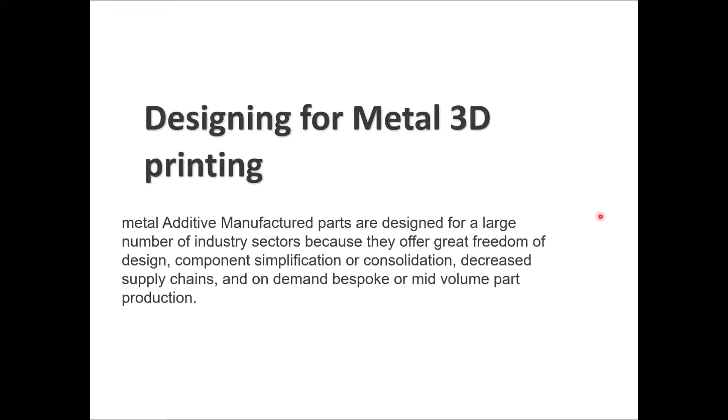Flashback to metal printing. Again, you have your laser being directed in a programmed way on the surface of the powder, and it will melt the powder and form the layers. Then the base will lower down the thickness of a layer and build the next layer, and so on until you get your final part.

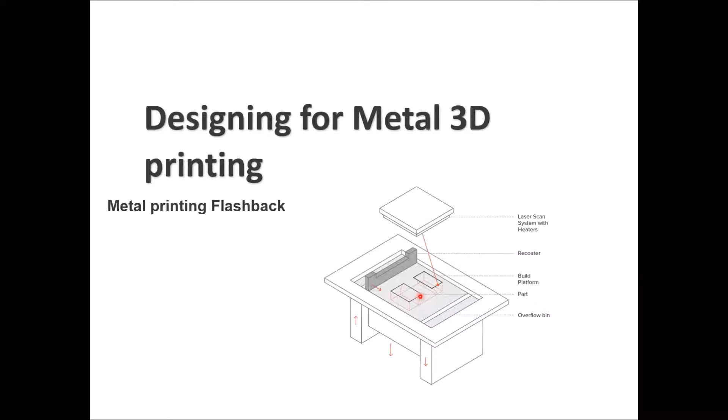The properties we want to look into while designing for metal 3D printing include wall thickness. The minimum wall thickness needed to ensure a successful 3D print with this technology should be 0.4 millimeters or higher. You can go thinner or finer, but this depends on the material, orientation, and printer parameters you're using.

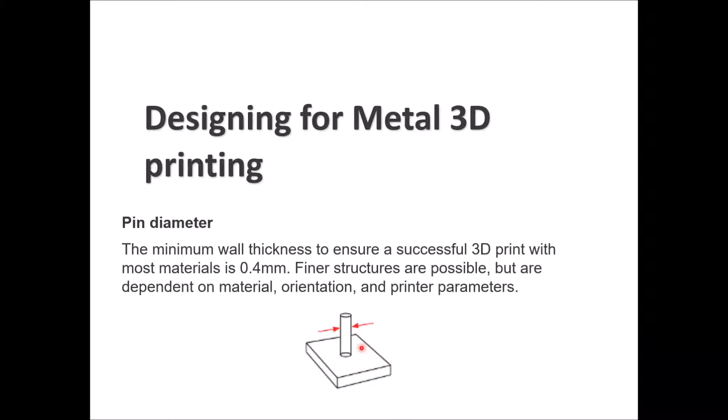For the pin diameter, the minimum diameter for that pin should be 0.4 millimeters.

For the hole sizes, hole diameters should be between 0.5 up to 6 millimeters without any support. If you want to build holes without any support using this technology, you can go up to 6 millimeters or even 10 millimeters, but while taking care of the orientation.

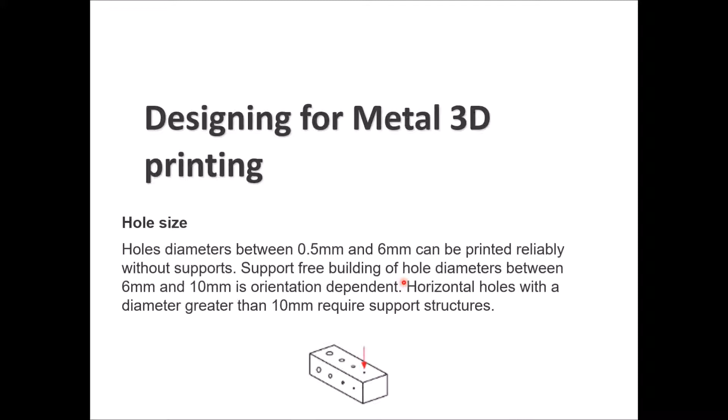If you have horizontal holes with a diameter greater than 10 millimeters, then you need support in that case.

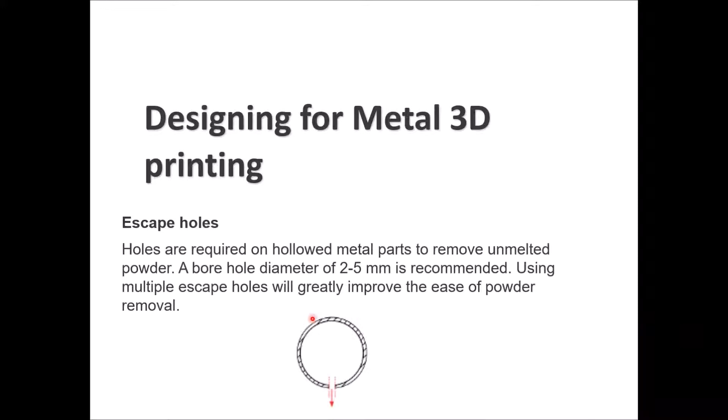Escape holes: any technology doing 3D printing based on powder needs some escape holes to clean up any unformed powder out of your design. Holes are required on hollowed metal parts to remove the powder. The bore hole diameter should be 2 to 5 millimeters as a recommendation. If you create more than one escape hole in your design, that will make your life easier while cleaning the powder out, giving you more options to get rid of the powder inside.

Overhanging surfaces: if you have a design with an overhang that doesn't have support, then you have some limitations. Without doing any support design for the overhangs, the surface should be 45 degrees relative to the horizontal. But it's possible to reduce this angle further by optimizing the laser parameters for the printer.

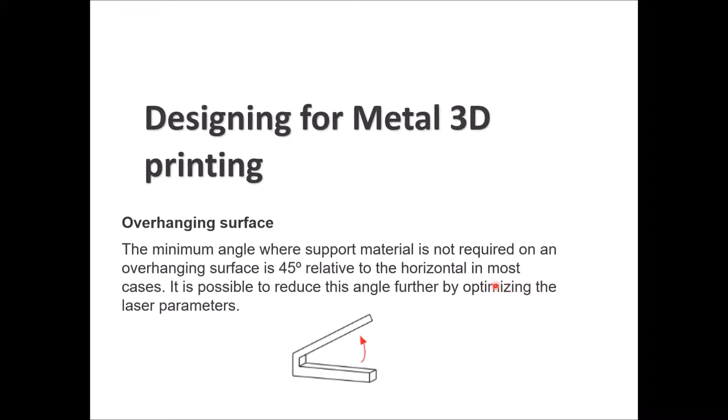If you have unsupported edges, as we can see here, these lips are unsupported edges, a kind of bridging as you remember from before. So if you have that kind of design, the maximum length of the cantilever style overhanging surface should be 0.5 millimeters. If you have overhanging horizontal surface support, it can be 1 millimeter long.

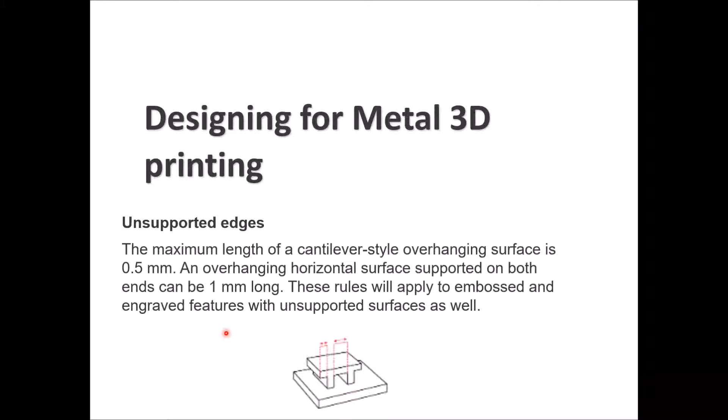You can apply these same rules if you have embossed or engraved features with unsupported surfaces as well.

For the aspect ratio, the maximum ratio between the vertical pin height and the part section is 8:1. So the height relative to the part section should be 8:1 - if this height is 8 millimeters, then the thickness should be 1 millimeter, so that there's stability for the printed parts on the build plate. Otherwise it may bend, curve, or fail entirely.

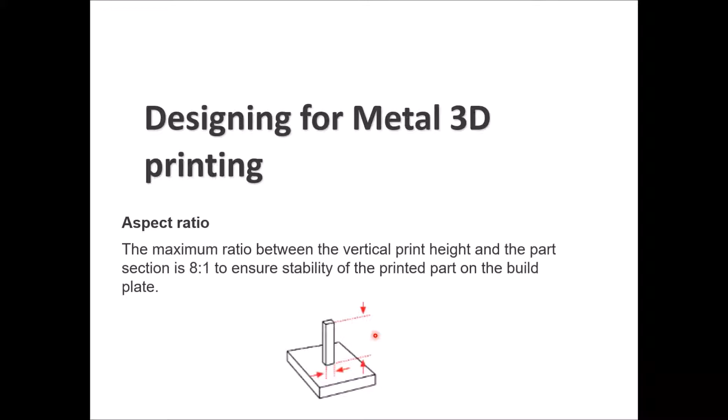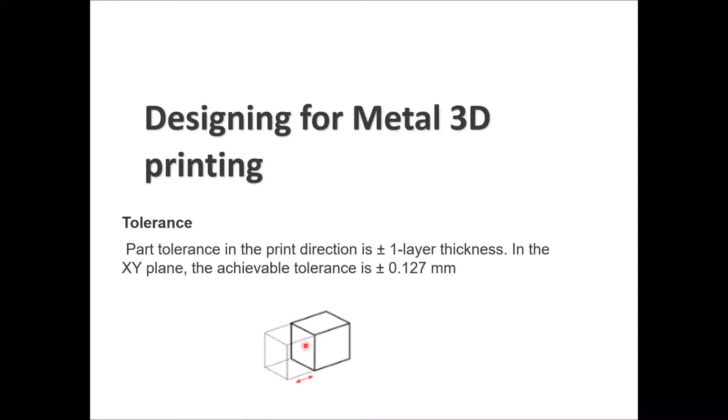For tolerances, the part tolerances in the print direction could be plus or minus 1 layer thickness. In the XY plane, the achievable tolerance could be plus or minus 0.127 millimeters.

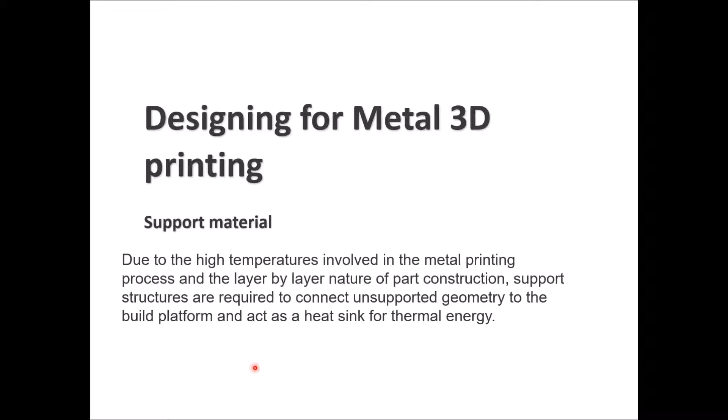For the support material, in this kind of 3D printing you are melting the powder to create a metal. There are high printing temperatures involved, and a layer by layer nature of part construction. So support structures are required to connect unsupported geometry to the build platform and act as a heatsink for the thermal energy.

So the support performs main roles for the part made using this technology. Metal printing melts or sinters the layer of powder at very high temperature, so each layer needs something solid to be built upon. It's not just powder that you solidify with a laser like the SLS process - for any section not attached to the build plate, you need support structure printed first, then you have your solid section built on the top surfaces. Just keep that in mind.

Residual stress is a concern as well for this technology, because it results from differential cooling, which makes each layer of a metal print want to curl up or distort. You need to add support so that it helps draw the heat out of that layer, so it will be sealed down in place and will not curve, curl, or distort during printing.

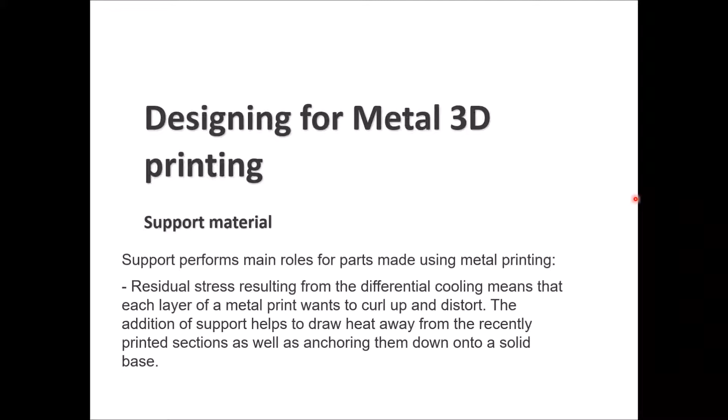As we can see here, this is a metal 3D printed part. You can see the supported materials inside the part. These supported materials need to be removed when you finish your print. The surfaces in contact with support always need extra post-processing so you can have a good surface finish.

This body here will be smoother than this one by nature, but you need post-processing for the unsupported parts, but mainly for the supported parts, with a focused and repetitive process to achieve the smoothness or surface finish you need based on your application.

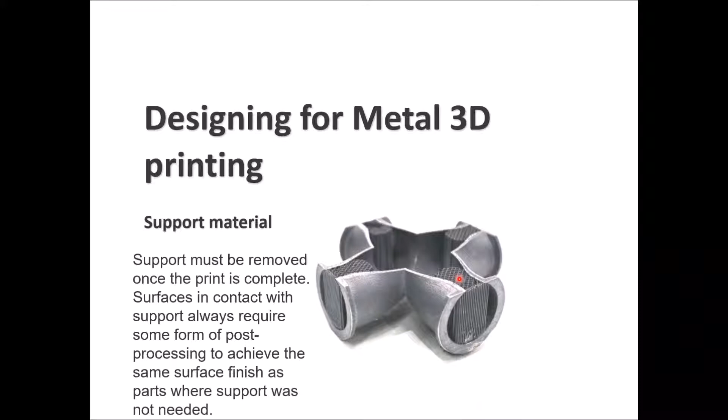For the surface quality, sometimes your design requires one side of the part to have a smooth surface, which is the side that people can see. In that case, where you care about the smooth surface finish, you always need post-processing.

If you want the part to have good surface quality, you also need to take care of the orientation. Always design your part with upward facing surfaces in mind, because the upward facing surfaces will have sharper edges and a better surface quality than the ones facing the base of the print.

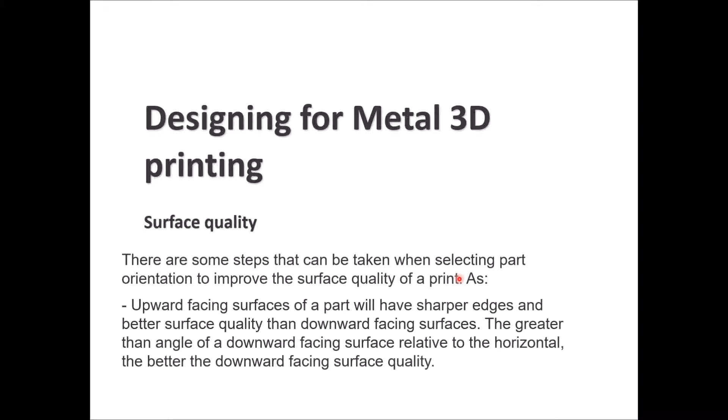The greater the angle of a downward facing surface relative to the horizontal, the better the downward facing surface quality.

A limitation of this kind of printing technology is the cost. The cost of the metal additive manufacturing machines and the material used are very high. So most likely you will go with traditional methods of manufacturing because they are more cost-effective solutions.

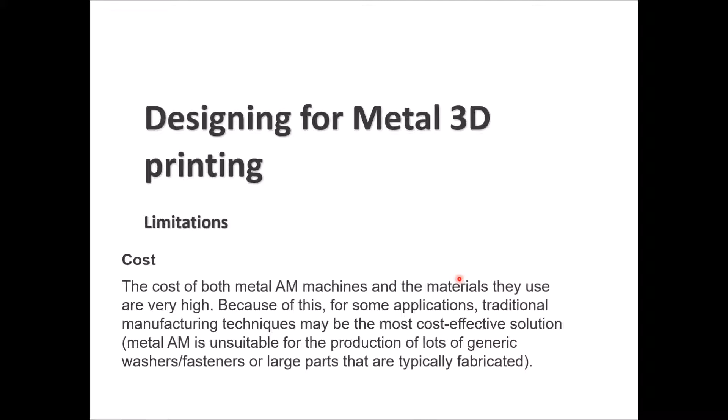But if you are doing a professional purpose solution, then you can go with this method: design for additive manufacturing.

Usually people think that metal additive manufacturing can fit all applications and designs, the same as conventional 3D printing technologies, like anything printed with FDM or SLS can be printed with metal 3D printing, but that's not always true.

If the part was originally designed for conventional manufacturing, then most likely there's a high possibility that you will fail to print that part with metal 3D printing.

As we mentioned previously in other lectures, before you start your design, you want to think about what kind of 3D printing technology you're going to use, what kind of material, what kind of printer, and what's the limitation and capabilities of that printer, before taking any step toward the design, because your design will change a bit differently between each 3D printing technology.

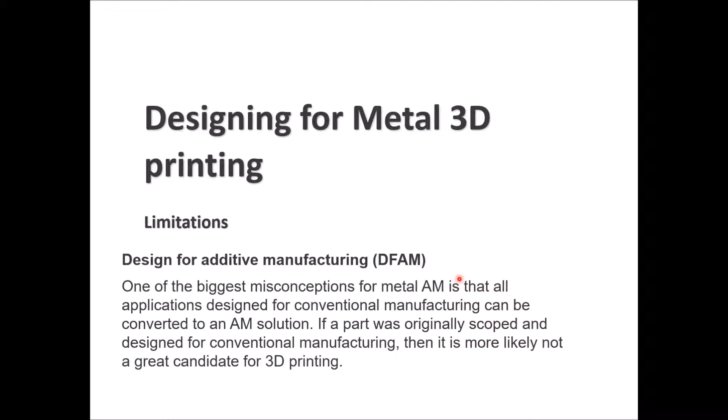Metal 3D printing is considered a complex printer. Usually they are not plug and play. Even the material itself and its application, the way you add it to the printer, all of that needs technical expertise and technical skills.

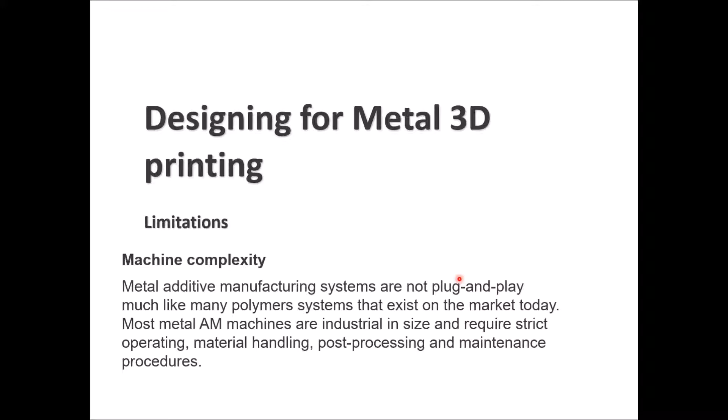Most metal additive manufacturing machines are industrial in size, as big as a closet. You need controlled operation and material handling, post-processing, and maintenance during operation.

Most common post-processing methods for metal printing are heat treatment, support removal, machining, and surface treatment.

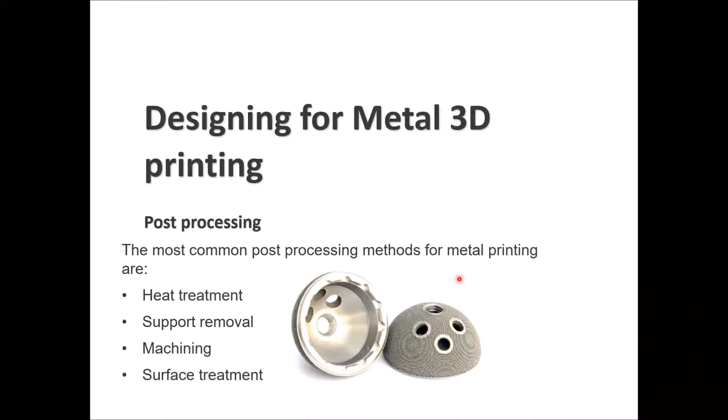General rules for metal 3D printing: support is critical for the metal printing process, and the geometry, placement, and amount used should be optimized to save time and cost.

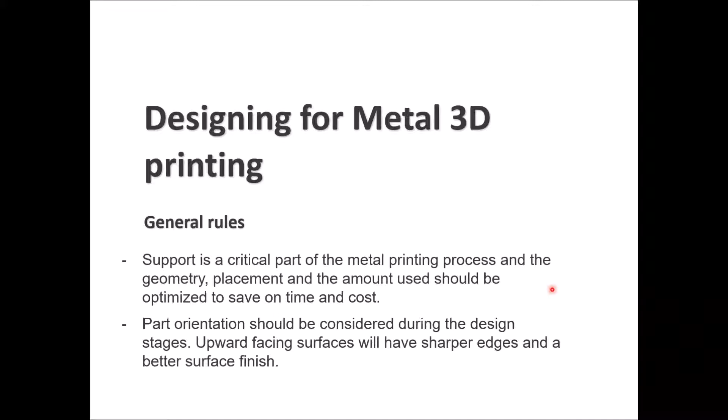Part orientation should be kept in mind during design stages. Upward facing surfaces always have sharper edges and a better surface finish than the downward facing surfaces.

Quick overview of design features: wall thickness should be a minimum of 0.4 millimeters in width. Pin diameter should be higher than 1.5 millimeters in diameter. Hole size diameter should be between 0.5 to 6 millimeters without support, and greater than 6 millimeters needs support. Escape holes need to be a minimum of 2 to 5 millimeters in diameter.

Overhang should be greater than 45 degrees from horizontal to keep it unsupported. If you have unsupported edges, the maximum is 0.5 millimeters. Aspect ratio is 8 to 1, build height to section width. Tolerances should be plus or minus 1 layer thickness in the Z direction, and plus or minus 0.1 millimeter in the XY plane.

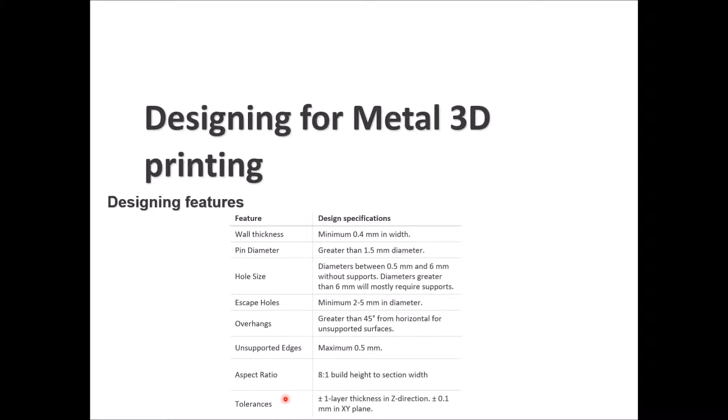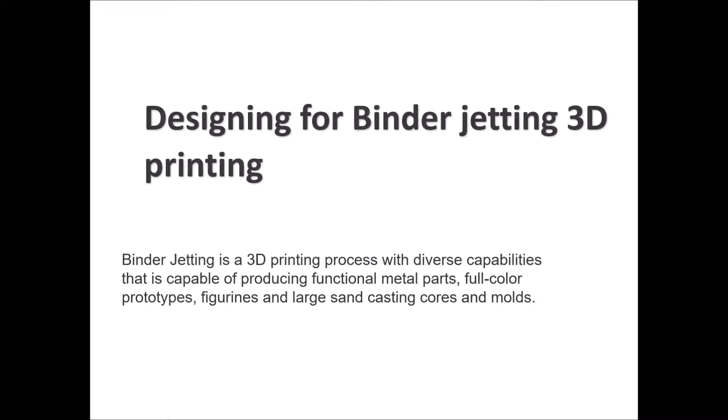Talking about designing for binder jetting 3D printing, we mentioned previously that binder jetting is a 3D printing process with diverse capabilities. It can produce functional metal parts, full color prototypes, and large sand casting cores and molds.

Binder jetting flashback: you have inkjet print heads, and you have in here, let's change this.

You have inkjet print heads, and you have the part being built, and you have the powder bed around it. Your part will be built eventually by following the program sent to the printer.

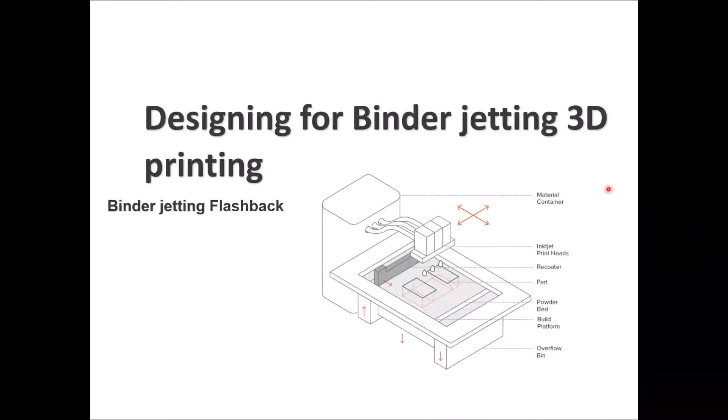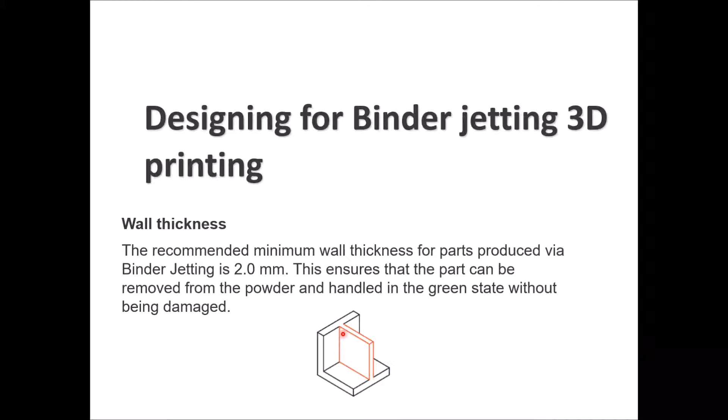For wall thicknesses, if you have a wall thickness similar to this design, the recommended minimum wall thickness is 2 millimeters. This ensures the part can be removed from the powder and handled in the green state without being damaged. Even though the part is newly printed and still warm, with material not fully solidified, this thickness prevents it from failing during removal from the powder.

For unsupported walls like this, whatever called fins or ribs, there's great risk of damage under any axial or especially lateral forces. So it should not be thinner than 3 millimeters in thickness.

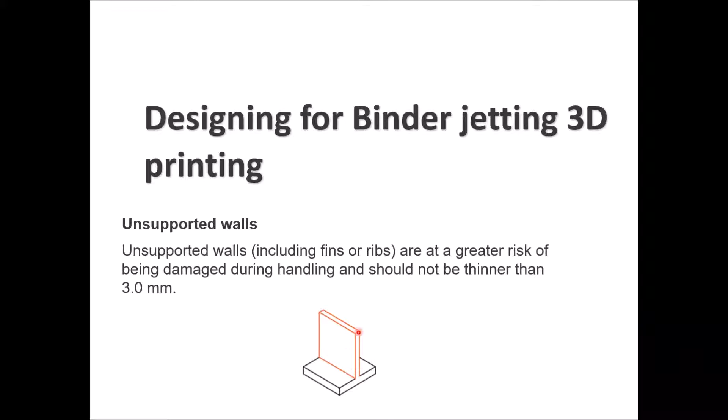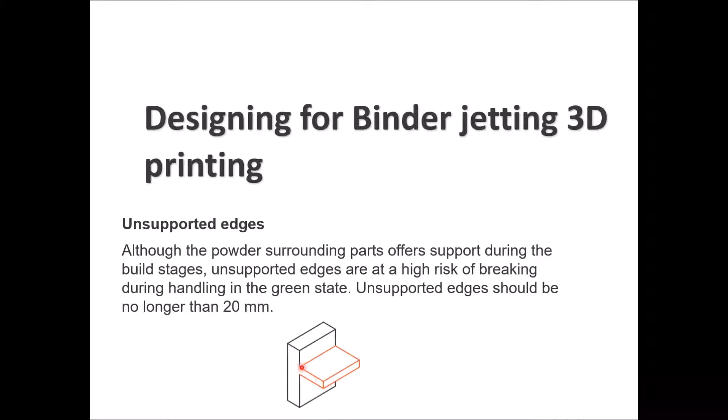For unsupported edges, again kind of side fins, we know the powder is all around the part supporting it, but unsupported edges are still at risk of breaking during handling in the green state while not fully solidified. You're handling the part, it could be pulled or knocked with something, it could be distorted. So unsupported edges should be no longer than 20 millimeters in length, meaning 20 millimeters of extruded length up from the original surface.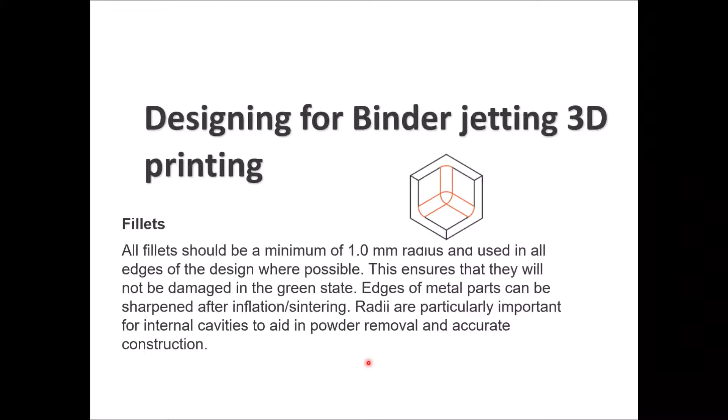Edges of the metal parts can be sharpened after infiltration or sintering. The radii are particularly important for internal cavities so that it will support powder removal and accurate construction.

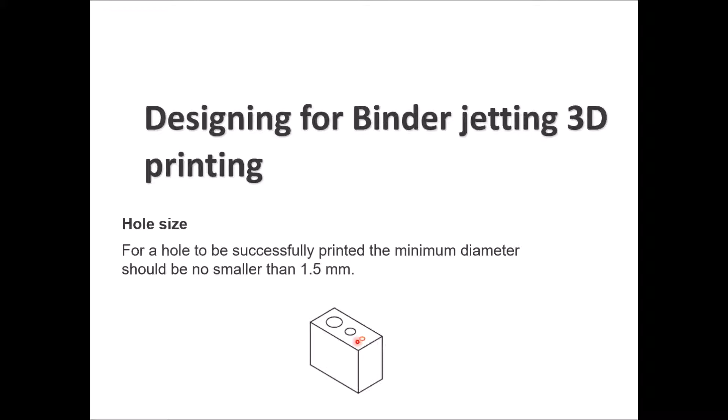For hole size, to be sure your hole will be precise in diameter and will not have any distortions or misprints, you should have no smaller than a 1.5 millimeter diameter hole.

Escape holes are important as well, as long as you're using powder. Any 3D printing technique that uses powder needs escape holes to get rid of the powder that's still not melted yet. Binder jetting can produce hollow sections, working by sintering the powder, so you need to remove the unwanted powder through escape holes to let it escape with gravity. Escape holes should be a minimum of 5 millimeters in diameter, and you should use at least 2 escape holes in one enclosed part.

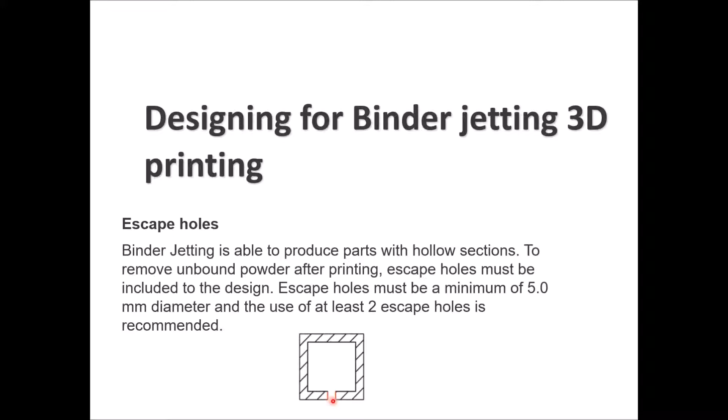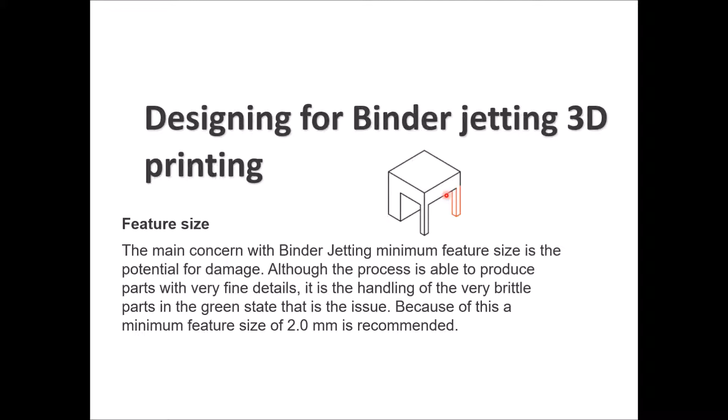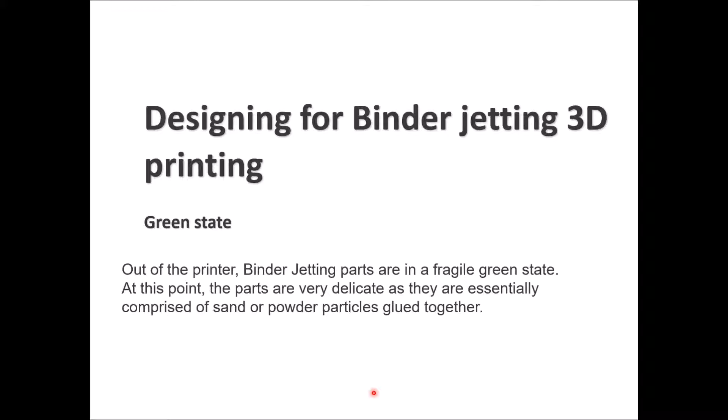Green state: out of the printer, binder jetting parts are in a fragile green state. At this point the parts are very delicate and essentially comprised of sand or powder particles glued together, so it's easy for them to be distorted or broken.

If the part is too fragile to be handled in the green state, then secondary post-processing cannot be applied. Usually post-processing involves removing the unbound powder from the surface of the part, using brushes and pressurized air, then strengthening the part through infiltration or sintering steps. So you need to wait until the part is not in the green state anymore before doing post-processing, which makes sense.

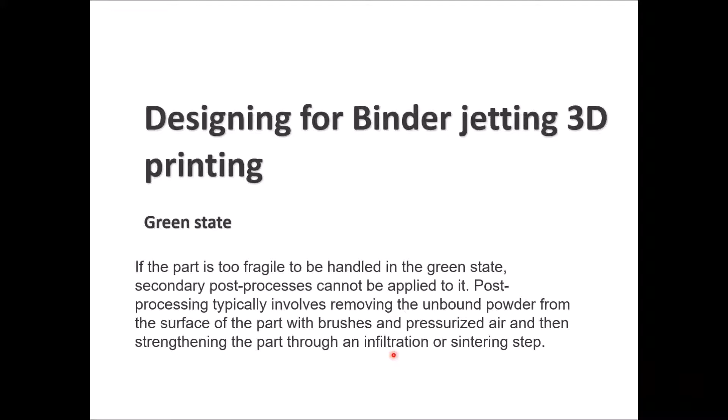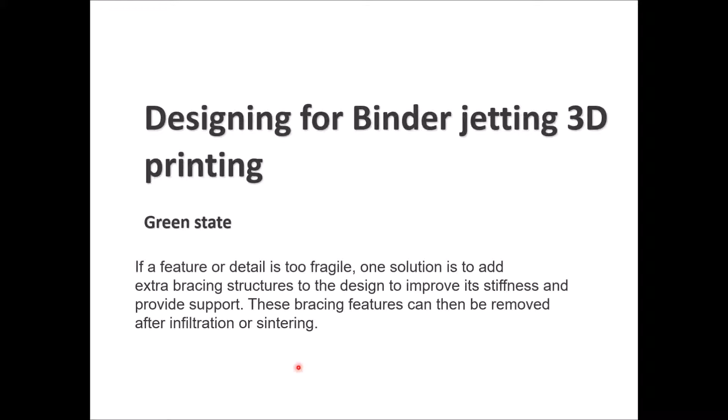As a designer, you want to follow the guidelines to ensure the parts are strong enough to survive handling during post-processing. If the feature detail is too fragile, you can add extra bracing structure to the design to improve stiffness and provide support. These features can then be removed after infiltration or sintering.

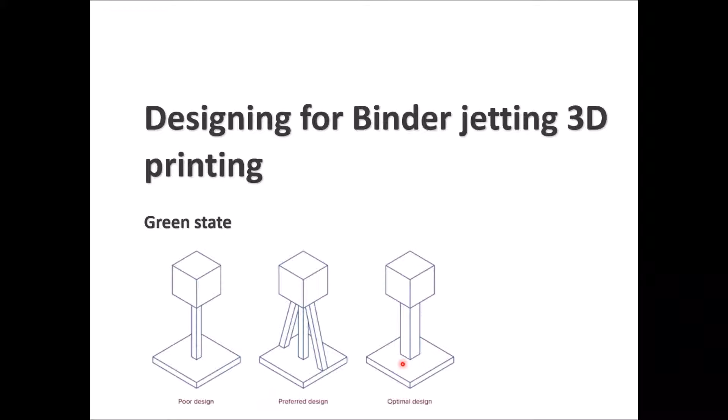These are three designs about the green state, showing how to best support the part from failing. This is a poor design—it can easily be compromised, broken, distorted, or bent. The preferred design has enough support for your hanging part. The optimal design has enough thickness, as mentioned before, an 8:1 ratio between the height and the base thickness. Keep that in mind and your design will be successful without facing troubles during implementation and printing.